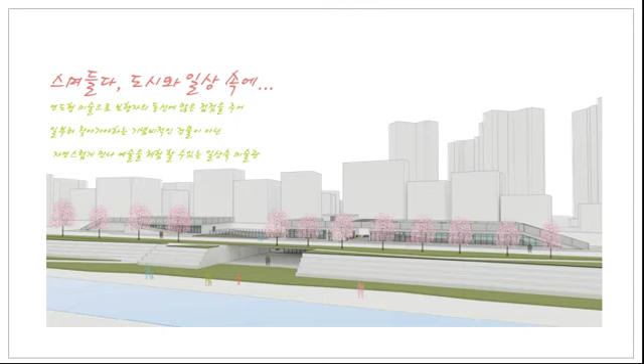It is a concept that you naturally encounter an art museum while passing by on one side of the trail. I wanted to apply this concept to the art museum design. In the past, the personality of art galleries was mainly for the purpose of collecting, and art galleries were used as a space for conservation, not sharing.

Modern art galleries have been recognized as public, cultural, and pop culture spaces. As a result, hands-on art galleries and rest areas have become important. The main functions of art museums are divided into collection, preservation, research, exhibition, and education, which have evolved with changes in the social meaning and educational role of art galleries depending on the times. Initially, preservation and exhibition functions were important for experts, but now they have opened as facilities with public functions responsible for the education and distribution of art to the general public.

People could experience art museums only when they were determined to visit them because they thought of them as monumental elements. In modern society, the need for consumption-oriented and experience-oriented factors has grown. I thought the problem of the museum was that the movement and exhibition-oriented art museum form, extremely induced by the designer, reduced the number of visitors.

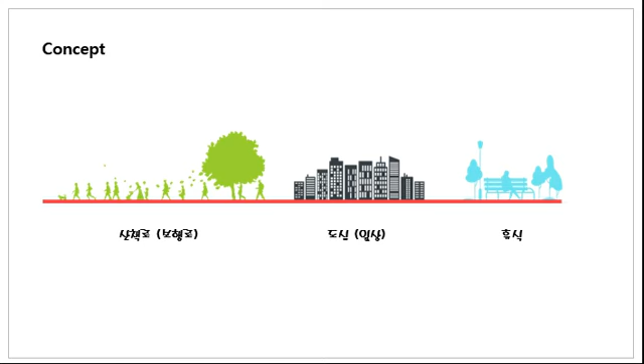The location of the site is 1419 Suwan-dong, Gwangsan-gu, Gwangju. Although Gwangju has the title of a cultural city, there are not many cultural facilities, and the reason is that it is easy to connect to the location of the selected city center and our daily lives. Asia Culture Center, Kim Dae-jung Convention Center, Gwangju Museum of Art, and most of the cultural facilities are in a region other than Gwangsan-gu. Therefore, I thought that more cultural elements were needed in Gwangsan-gu.

On January 1, 1988, Songjeong-si and Gwangsan-gun were incorporated into Gwangju-si, and Gwangsan-gu was established. It became Gwangsan-gu, Gwangju on January 1, 1995.

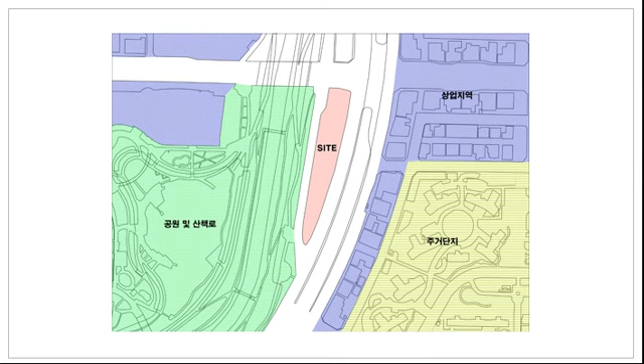The site is a commercial area in the city center, with parks and a promenade stream on one side, and residential complexes and commercial areas on the other. I would like to design a walkway-connected art museum that connects the walkway and the commercial district walkway through the art museum, according to the concept.

Location of the neighborhood in the city: on the left, there is a lower area than the site and a lake park promenade, which provides a relatively wide view. On the other side, it is usually blocked because of the roadside, tall apartments, and commercial buildings. I want to eliminate existing tall buildings and open up the view with low building mass.

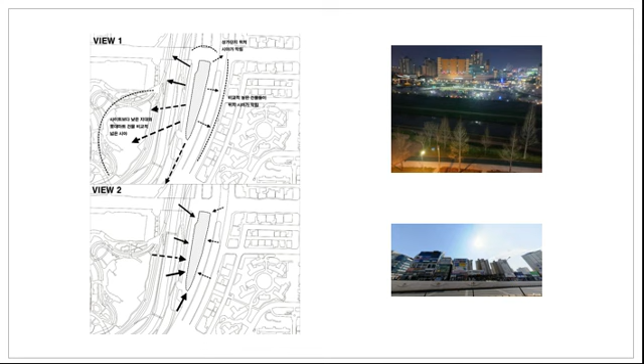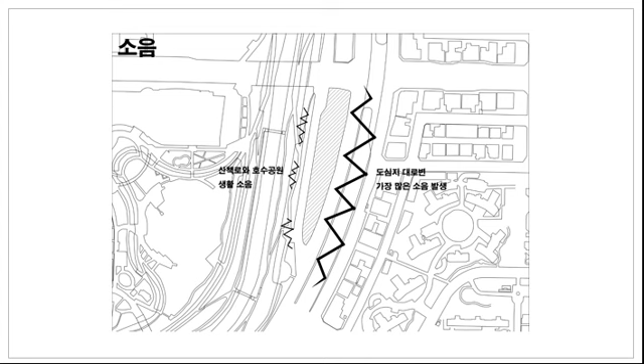The right side is located on the roadside, causing the most noise. Therefore, on the right side of the boulevard, we would like to design facilities other than the museum in a double-space structure.

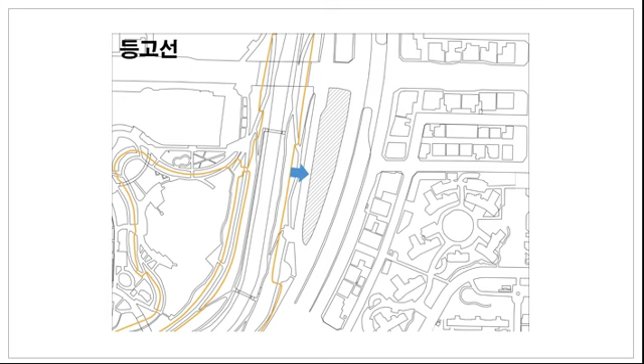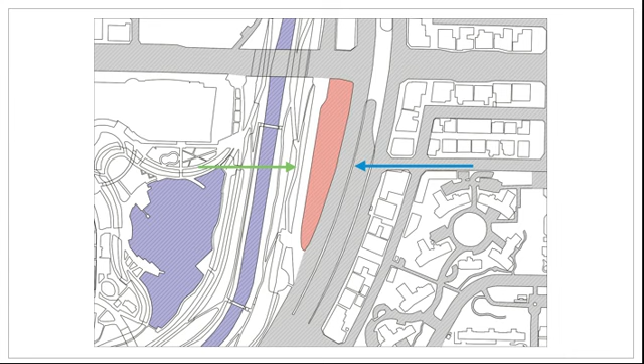Pedestrian and vehicle movement system: it will be designed to be accessible from various aspects without emphasizing the entrance, and to be accessible from the promenade section of the stream. By using the location of the land, it will be used as a connection point to the site, which is made up of large disconnected roads and tall buildings.

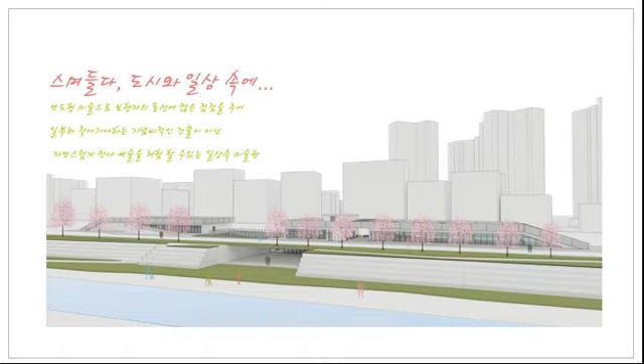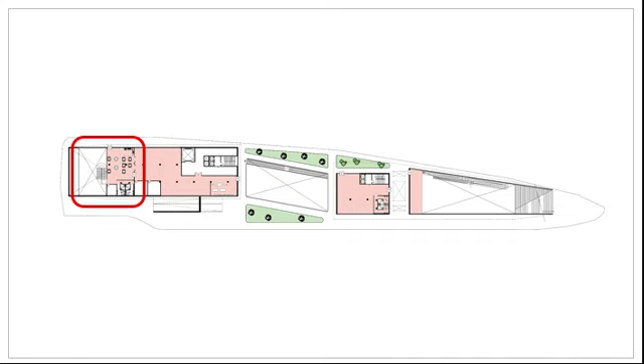This is the cafe section on the ground floor. It is a cafe that has a double-decker structure through open space, exhibition halls, and stairs. A cafe was placed at the entrance of the site, at the end of the museum, making it easier to access the museum by increasing community activities and accessibility.

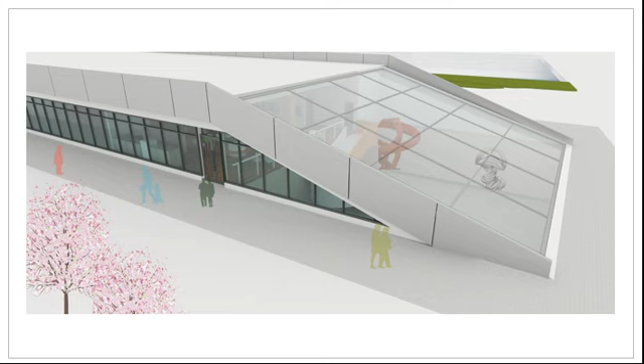This is the outside of the cafe section. Transparent glass from the outside was used to allow light to enter the underground exhibition hall. At the same time, it allowed visitors to see activities taking place inside, or exhibits such as sculptures. When the exhibition is not held, programs for various hands-on activities can be conducted.